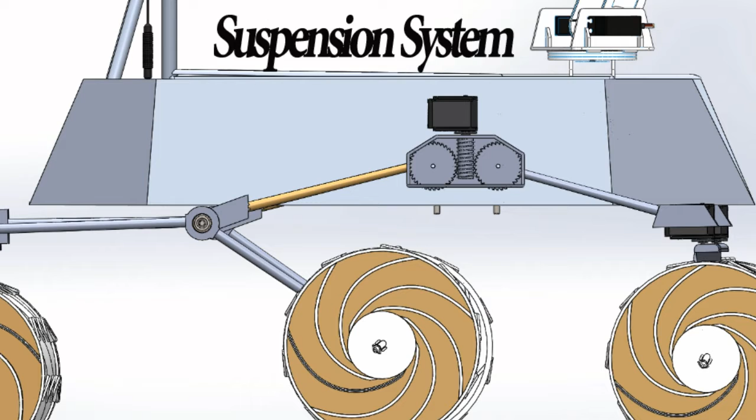According to obstacles, rocks dimensions and field ground type, we designed our rocker bogie suspension system with 6 wheels. Our own wheels are supported with needed specifications. It is 20 cm diameter and 15 cm width to prevent sinking in sand. It is also made from PVC, which is light, strong and flexible.

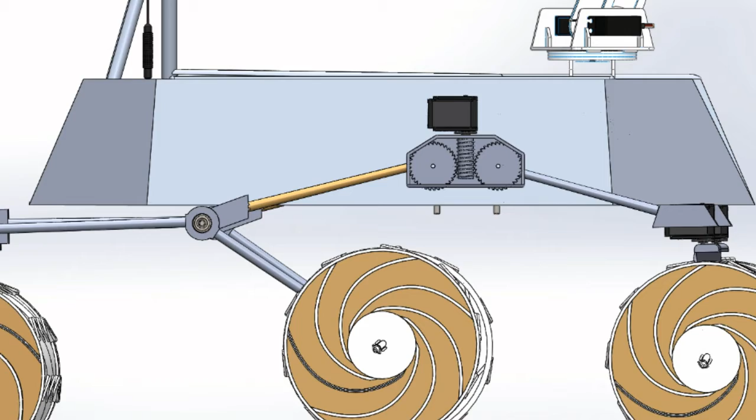It is also connected to the center by a spiral connection to work as a damper for vibration. It is also covered by rubber, as we noticed that many rovers are slipping on smooth rocks. All of these features enable us to finish long distance tasks in a specified time.

A rocker bogie suspension system with 6 self-powered wheels and differential gear is used to guarantee a permanent touch to the ground to avoid any tipping or slipping. Additionally, the corner wheels have high torque steering servo motors that enable the robot to rotate around its center smoothly.

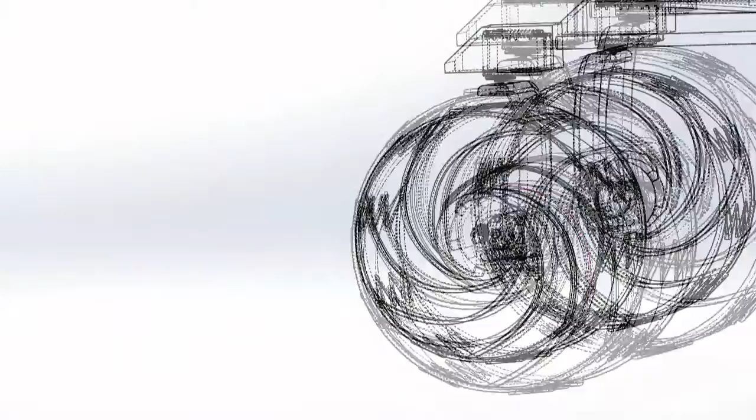As we see, our modification in rocker bogie suspension was designed to decrease the distance between the centroid of the robot and the ground by using a geared motor so that it will avoid any tipping in steep cliffs.

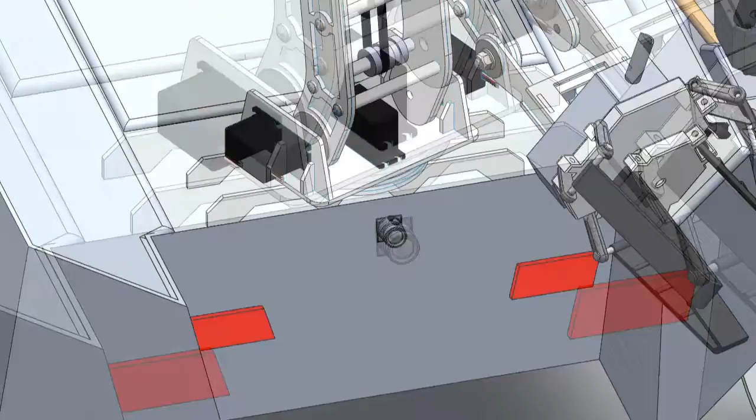For a more efficient vision system, our rover has 2 cameras. The first one is fixed and it is also an emergency camera. The second camera is the main rover eye and it is fixed on 2 servo motor holders, which gives the camera 2-angle motion.

Robust rover chassis is made from 3mm aluminum. It has boxes for payloads such as circuits, batteries, and onboard lab.

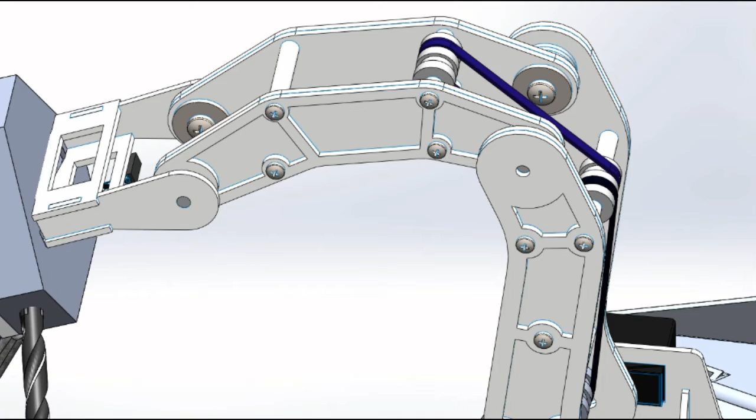The rover manipulator has 5 degrees of freedom, and instead of designing motors in each joint, which consume a lot of motor torque due to their weight, we designed the motors to be placed in the manipulator base. These motors move all joints by using a belt transmission with the appropriate gear ratio.

We also designed multitasking in the end effector, which includes driller, suction tube, and gripper. That enables us to complete the required tasks easily.

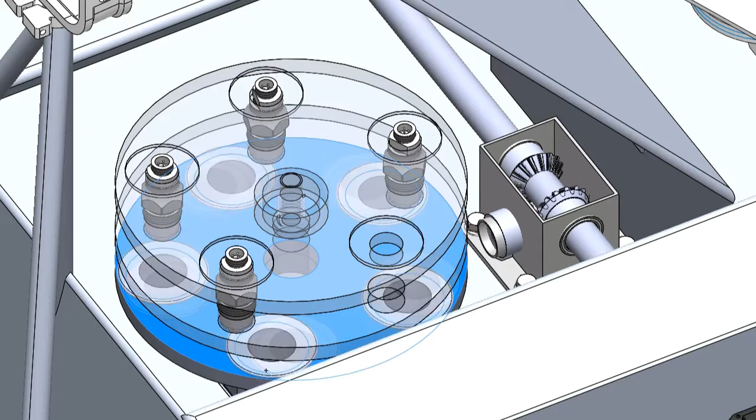As shown, the rover's onboard lab mechanism is designed to keep and analyze more than 1 sample at the same time. The sample tubes are fixed on a plate that rotates under the sensor plate that moves down to begin analysis.

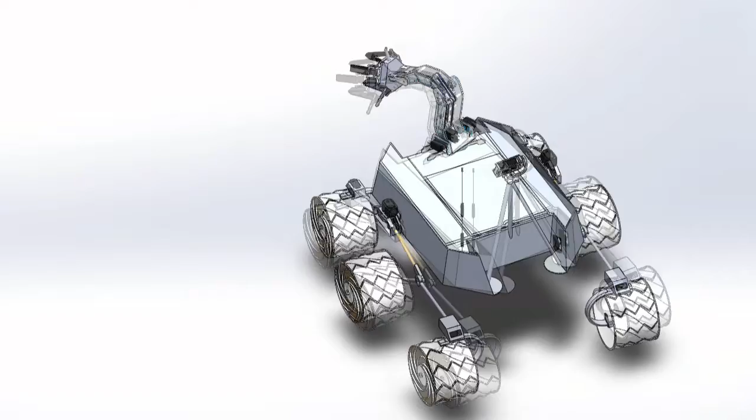And now, let's go to the software. Our control system consists of 2 microprocessors on the rover, BeagleBone Black and Raspberry Pi. Also, we have in the control station a pilot and co-pilot. They work together as a distributed system.

As we see the connection between all system components in normal state, BeagleBone Black is the main controller on the rover, which is mainly responsible for controlling the following subsystems: motion system, navigation system, manipulator, and onboard lab. And it is connected to a backup camera for emergency states.

Raspberry Pi's main responsibility is controlling the manipulator camera and the main rover's camera and sending the streaming video over the network. In our system, we cared about handling many failures which could happen to the system. These failures are communication failure between the station and the BeagleBone processor.

In this case, the pilot will switch the motion control and navigation system to Raspberry Pi to enable the pilot to control the rover until the BeagleBone is back to work again.

Also, in communication failure between the station and the Raspberry Pi, to prevent the blindness of the rover, we connected an emergency camera to the BeagleBone, as we see, which is switched on by the pilot in case of Raspberry Pi failure. Also, in communication failure between the station and the 2 microprocessors, the autonomous mode will start automatically by the BeagleBone or Raspberry Pi and go back with the rover to the last location before communication loss.